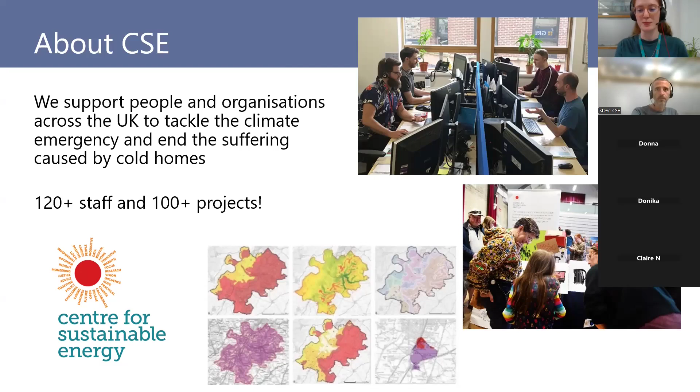Steve, I think this part is you. Just to point out, the community engagement team is not just me and Kate. This is to give you an overview of principles and what's involved and some of the things we all need to think about. We'll talk through pros and cons of different bits, but this won't be detailed advice for your house, and it's not going to replace the advice of a qualified professional that's looked at your home. It probably won't make you an expert, but hopefully it will give you some of the basic considerations.

After the online materials, so we've got these 3 units over 3 evenings, we'll have a downloadable home energy survey that you can take to look around your house. Steve and I are going to lots of Green Open Home or Green Open Home adjacent events in the next few months, so you're very welcome to come to an event and ask us questions. Some of our events will be going around homes and looking at issues that we're going to be talking about over the next 3 weeks.

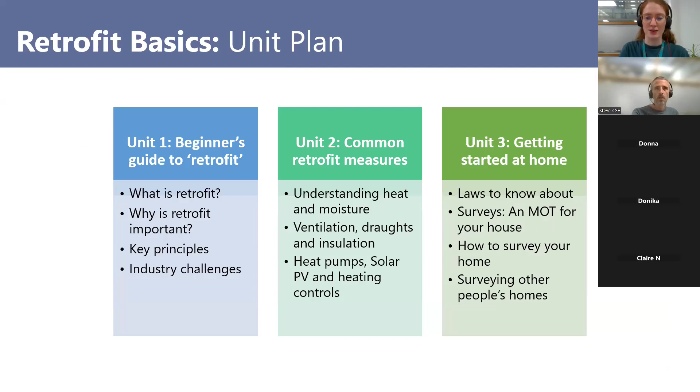So today we're starting with Unit 1: what is retrofit, why is retrofit important, and key principles. That's where Steve really gets to take the wheel and run away with the details. We might discuss some of the challenges and controversies in the field and conclude with the key things to remember from this evening. Steve, I've just realized I don't have the seeing the notes function because I'm recording on my screen, so please do butt in if I've forgotten something as I'm speaking. No problem. Great, thanks Warren, for joining us as well.

All right, I think this might be you, Steve. So what is retrofit? If anybody wants to unmute and have a shout out, have a guess. Some people think it's a very technical thing. I'd be interested to know if people have generally heard of the phrase retrofit before, or if it feels like something they don't know very much about.

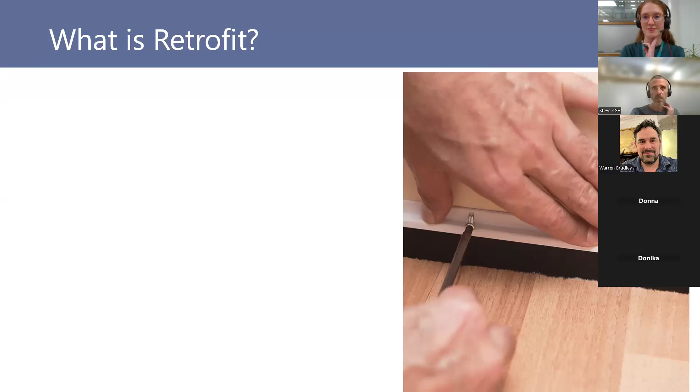Converting an existing property, okay. Yeah, yeah, I think that's pretty much bang on what we have here. It just means doing work to an existing building, try and make it more energy efficient, basically. It can include repair and maintenance, renewable technology, insulation, heating systems, and much, much more.

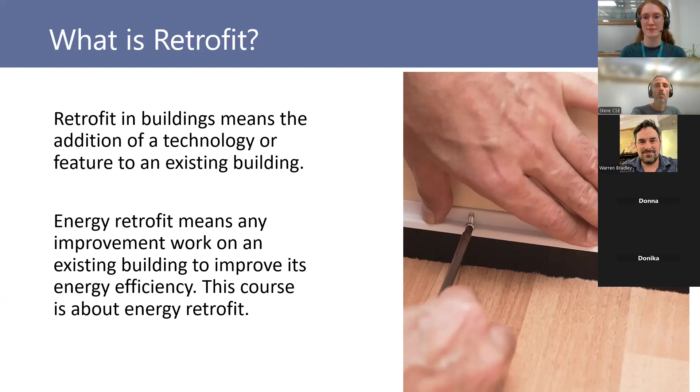When Steve and I have been doing our community events, it seems that some people hear the word retrofit and immediately think heat pumps, and that's the main thing they think of, but that's not just it. Oh yeah, thanks Hannah, no worries about the noise, that's fine.

In an ideal world, a good retrofit reduces your energy use and your consumption of carbon, so it's good for your bills, also good for the planet, and improves your health and comfort as well, ideally. That is what you aim to do. But poor retrofit - and there's been quite a lot of press about poor retrofit at the moment because of government insulation schemes having varying results - poor retrofit means failing to realize the savings, either energy, financial, or carbon savings. It can lead to increased damp, mould, fire risk, overheating, damaging our buildings, and damaging our heritage.

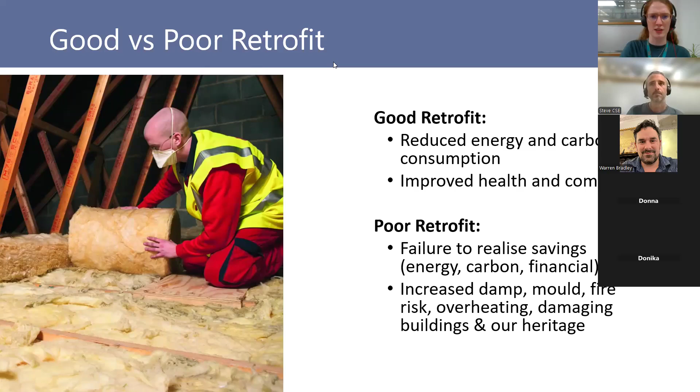Steve and I, in our projects, focus specifically on older buildings and traditional buildings, so that's a consideration for us. I think I might have that news article in the next slide. Oh yes, yeah, this was a favorite of mine. This is an example of poor retrofit that was in the news recently.

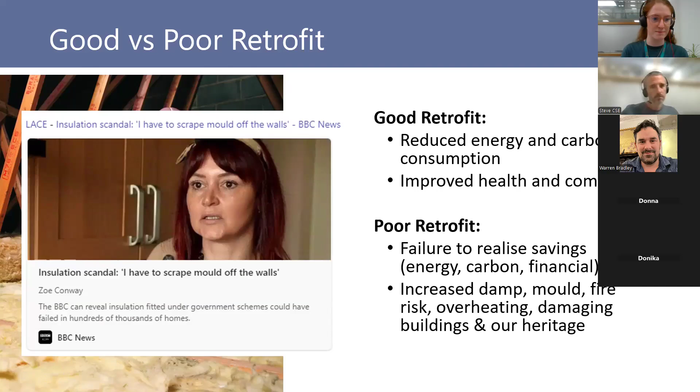But why, Steve? Why should we do it?

So why retrofit? Well, hopefully most of you are aware we're in a bit of a situation with our climate. Ideally, we should stop knocking down buildings and building new, because construction is particularly bad for the planet. We use a lot of heavily processed materials, and we tend to make a lot of waste. So if possible, let's try and keep our buildings, but make them fit for the future and a bit more resilient as our climate changes.

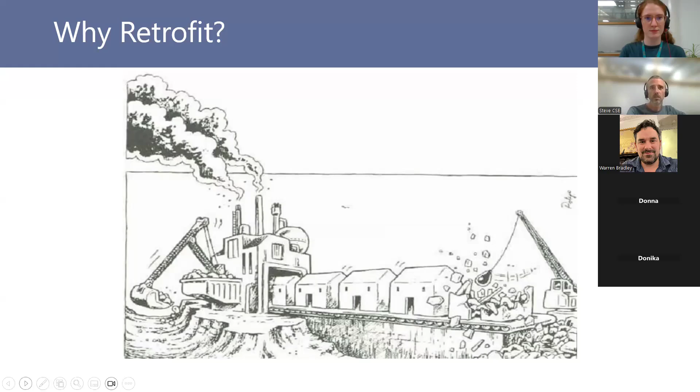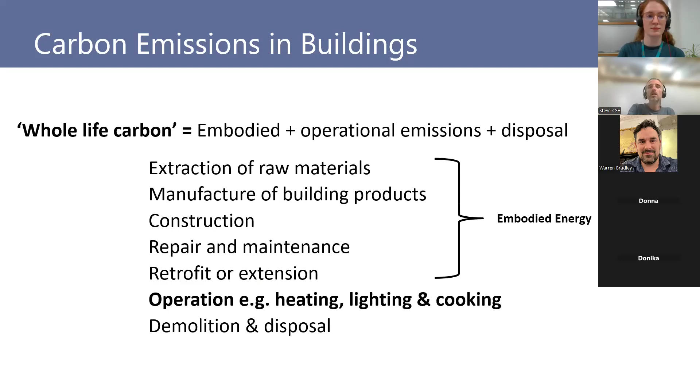That's why we try to encourage people to think about something known as whole life carbon, which includes embodied, operational, and disposal carbon. I think there's some more examples of that in the next slide.

And that's why we bring this up so early on in the training, just because it is kind of foundational information. In the next session, next Tuesday night, we'll talk more about specific measures, like double glazed windows and triple glazed windows, and have a bit of discussion around the pros and cons of installing new measures versus the embodied carbon of those new measures you're putting in.

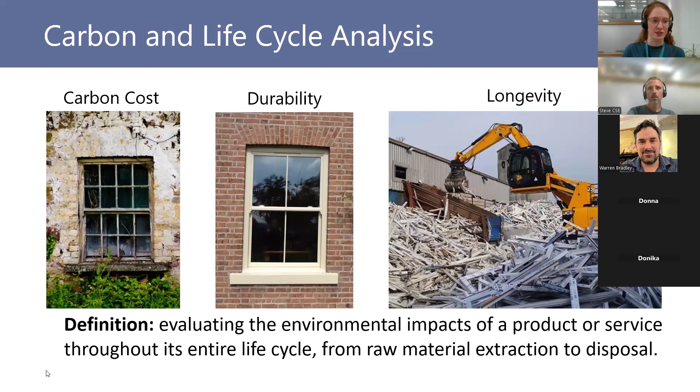Did you have anything else you wanted to add on this slide, Steve? I'm just looking at my notes. No, I think that's it.

So this is - lots of people tend to say our old buildings are old, damp, leaky, inefficient, and we should just knock them down and build new ones. I suppose the environmental point around that is actually, 80% of our buildings in 2050 are thought to already be built - sorry, I said that wrong. 80% of our buildings in 2050 are thought to already be built.

So we can argue, or try and get people to consider, that the most sustainable building is one that is already built. So trying to keep them and trying to improve them - that's why we retrofit.

And I realized, Steve, we forgot to say at the start your background and why you are a particular proponent of buildings that are already built.

Okay, I'm a heritage builder by background, so I am a qualified retrofit coordinator, and I also have my master's degree in sustainability and adaptation in the built environment. So I've given this quite a bit of thought over the years, and I've done a lot of actual work on buildings. So yeah, that's a bit about me.

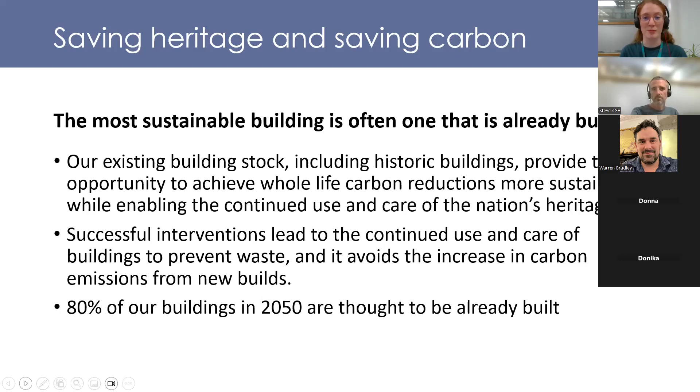Kind of your jam. And I have been working in community engagement with the Center for Sustainable Energy, but I am fairly new to this stuff with Steve, so I might be asking just as many questions as everyone else as we go along.

So climate change and retrofit. Traditionally with retrofit, people tend to think about improving operational energy efficiency in the winter. But we try to encourage people to think a bit more broadly than that. As our climate is changing, we also need to think about things like flood prevention. We are having more wind-driven rain, increased rainfall - I'm sure we've all seen that recently with some of the storms, and that's also led to flooding. But on the flip side, we're also getting overheating. Some of us don't think about that in the UK, and it doesn't happen very often, but when it does, it actually causes what's known as excess summer deaths, the same way we get excess winter deaths when people are too cold. We're also seeing increased relative humidity, which tends to encourage more mold growth. So it's not just about energy efficiency in winter - we need to think about the whole year with our buildings.

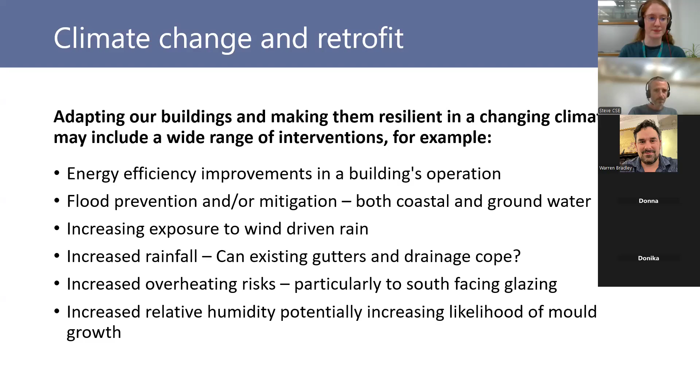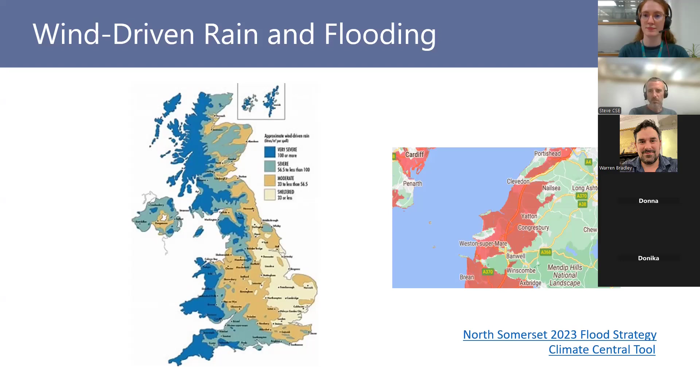All this is more reason why we should be doing retrofit. Steve, you were talking about overheating in houses being something we don't really think about in the UK.

Especially relevant in the political or funding climate, where insulation is something people are eager to give grant funding for, for people who live in areas of deprivation. But if we insulate all of our homes, we do need to still consider overheating.

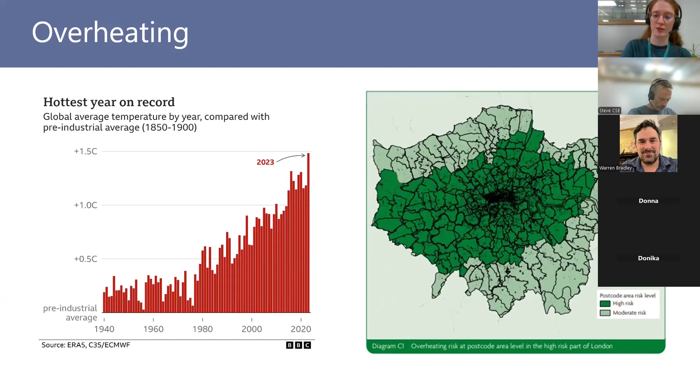The retrofit industry is also a place that is booming and will continue to boom in skills, education and jobs for people - there's a lot of opportunity in that field. It also builds pride of place, to look after the buildings that we have. So for these reasons, retrofit is great for adapting to climate impacts, and also hopefully contributes to leveling the playing field a little bit more.

Do you have anything you want to add to that, Steve? No, you're good.

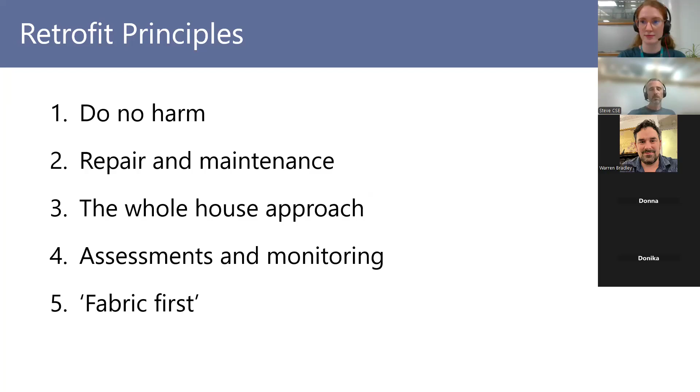So the first one, sometimes surprises people, but I like to think of it a bit like first aid. One of the things with first aid is first do no harm. I think we always try to encourage people to start from a position of knowledge and do a bit of learning about the building that you're in or the building that you're going to retrofit.

I appreciate people talk about climate emergency and there's a tendency to want to do everything very, very quickly, but we do need to understand what we're doing before we rush ahead and do it. So it's about starting with some knowledge, assessing the risk before we get carried away.

I know I said I can't read my notes from here, Steve, but I remember there's a line there that retrofitting your home isn't rocket science, but it is thermodynamics and building physics. Yes, so we'll talk about that thermodynamics next week. Yeah, we will. Very good. Yeah, we will talk a lot about moisture and mold next week.

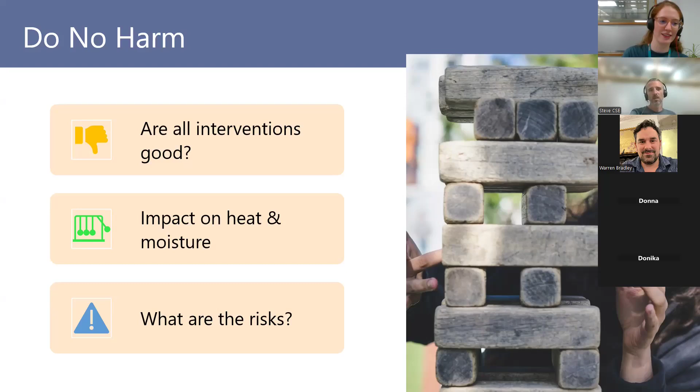So, lots of people don't sort of think that repair and maintenance is part of retrofit, but it really is. If we retrofit homes that are not in a good condition and haven't been repaired and maintained, then there's a chance that our work won't work.

And also after we've done retrofit, we still need to do repair and maintenance because there's a chance that the work we've done then gets undermined. I know there's been quite a lot of studies around this - it can actually massively reduce the operational emissions of a building.

So yeah, don't overlook it. I think that's the key message. And we'll have lots of examples of that next week. But yeah, if you're gonna put in new stuff, make sure the old stuff's working well first.

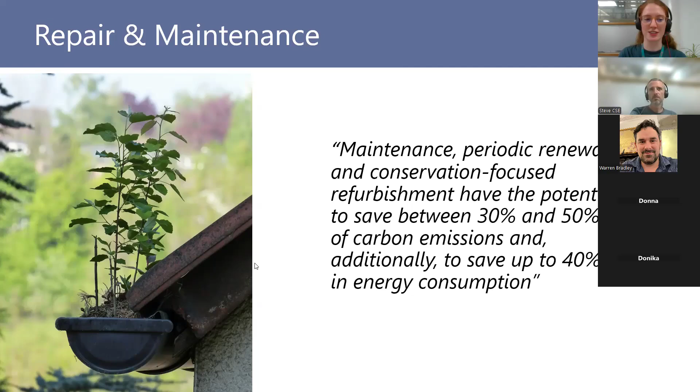Energy efficiency - forgive me if this sounds a bit complicated, but there's something called Jevons paradox. A guy a very long time ago, I think in 1865, noted that as we improve the efficiency of stuff, what actually happens is we tend to just consume things quicker.

And it's not just economists that argue for this. I've met lots of people that work in the conservation world who think maybe we need to be looking at energy sufficiency as opposed to efficiency. But I'll let other people decide that.

We do have something called rebound effects - that's where people can retrofit their homes, but then go on lots of long haul flights and end up using more energy, emitting more carbon.

Then we have things like pre-bound effects - we'll talk about this a bit later, but some buildings are not as inefficient as people think. So what can happen is you think you're going to save all this carbon and money on your heating bills, you do the work, but actually it doesn't save as much as we think. So it's just being aware that there are a few sort of pitfalls, I suppose.

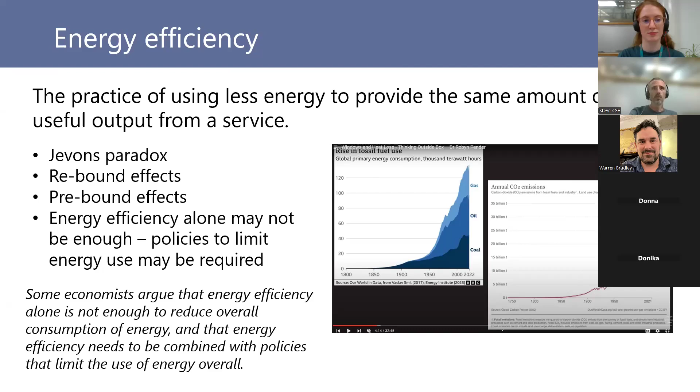And a whole house approach - apologies. Oh, no, go on. No, no, you go. Okay, but then make sure I'm saying it right.

Okay, so the whole house approach is really key to good retrofit, and it basically means this is not a one size fits all operation. You need to think about everything that's happening in that house to make it a bespoke approach for a balanced solution for that house. Specifically in this diagram, looking at the services - what's coming in and out of the house, your pipes, your cables, internet, that sort of stuff.

The fabric of the building means the walls, the roof, the floors, the outside envelope of your house. So what's that made of? What condition is it in? How old is it? Do you know how long it's been there for? Get as much information about that as you can.

The use of the house. What is the house being used for? This links quite closely to people - is it a very large building that just one elderly couple live in, so they don't use many of the rooms, or is it a share house with lots of people living in it who move in and out quite frequently, so they don't have time to look after the building? What will work well for one building won't work well for another, even if at a general glance they seem quite similar.

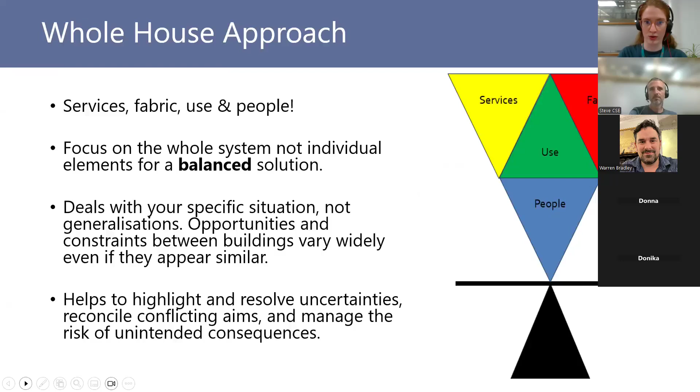When it comes to knowing what is going on in your building, assessments and monitoring are the key way that you can find out more about how your building is used. What is the air quality in your house? What is the humidity in your house? What is the condition of the insulation that's been in your walls for 30 years? All of that comes back to assessments and monitoring.

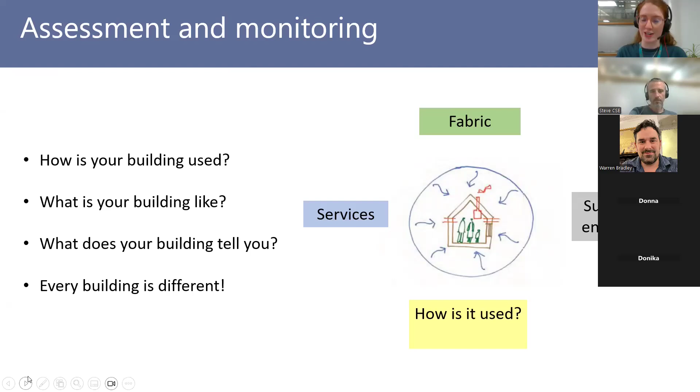For example, an assessment you might have heard of is an EPC certificate. Every home should have an EPC certificate if it's recently been bought or is being rented out. That's one example of an assessment that will give you an indication of how energy efficient your house is. But we'll talk a little bit more about EPCs here.

This slide is always controversial, because a lot of people tend to get taught this - oh, every house loses 35% through the walls and whatever. But I suppose it's just really trying to hammer home the point that all of our homes are different, and whilst they may look similar, you might have a neighbour that lives in a house built at a similar time to you, particularly if they're older buildings.

They've probably been worked on very differently over the years - sometimes it's more than 100 years. They will have had different tradesmen using different materials, they might have different heating systems, and again they're all used differently. So I appreciate why people like this image, but it frustrates me a little bit because it makes everybody think 'oh, my house loses this and my house loses that through the windows.' It's not quite that simple, unfortunately.

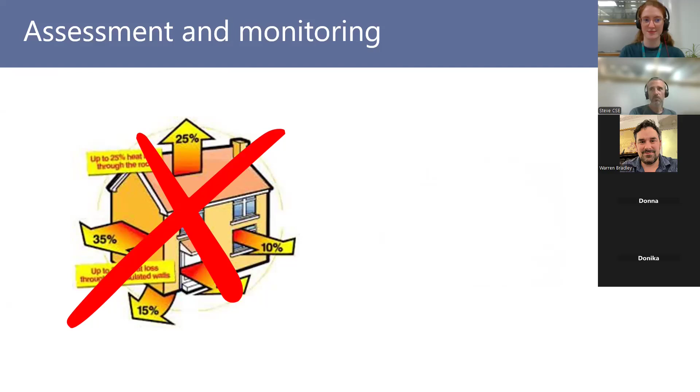This next image is Steve's preferred image - the size of the pie charts are all different because all of our homes are different, but actually the breakdown of the energy use in all of those pie charts is even different again. So it's just trying to be a bit more nuanced with this, and get us to think: well, my house will lose less heat if I've got loft insulation, whereas my neighbour doesn't have loft insulation, so that 25% figure might not be appropriate there. It really does come back to that whole house approach.

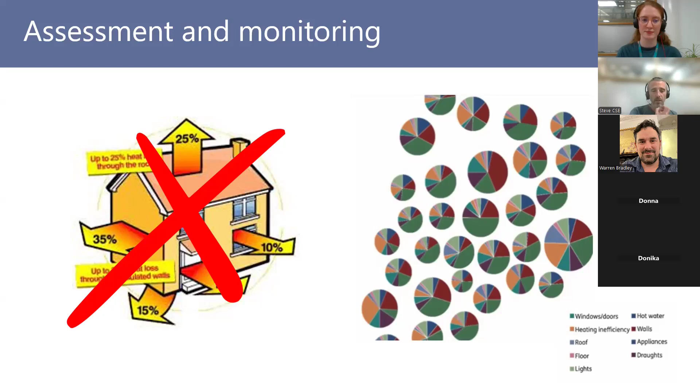Okay, assessments and monitoring. So I know Kate's just mentioned EPCs. Has anybody, well, I'm guessing a lot of you might have EPCs on your house. Has anybody looked at the recommendations that they've done?

No? Any volunteers? People can type in the chat. Sometimes, certainly not on older houses, but the more recent houses I've had them done, and yeah, it seems a bit wishy-washy sometimes.

I think I understand why lots of people like them because they try to provide a very easy overview of comparing our houses. But they tend to overlook a few things.

They tend not to consider the condition of a building. So if a building is damp, it's not reflected within the EPC. If a building is in a poor state of repair, that's not reflected in an EPC either. And as Kate was talking about before, we use our homes differently. So if you've got an elderly couple living in a house and then they move out and a young couple with lots of kids move in, that house is going to use energy in a very different way, and that's not reflected within an EPC.

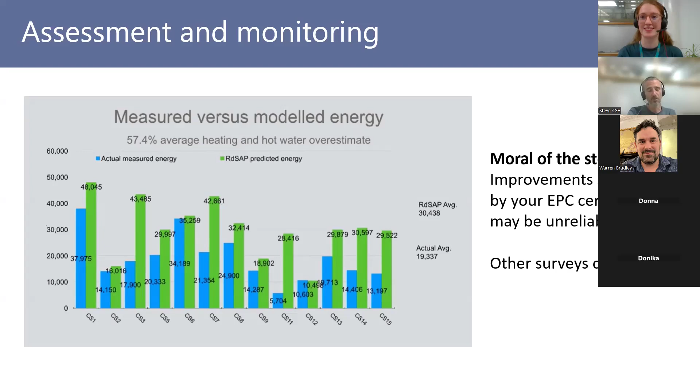And it's like back to that damp and mold stuff. If you've got damp and mold in your house, it doesn't matter what your EPC says—you've got damp and mold in your house, and you want to try and deal with that. 100%, yeah.

So, has anybody heard of Fabric First? Oh, yes, that's a good question. You could give us a reaction—thumbs up if you've heard of it, thumbs down for no. I'm not hearing much on the wavelengths.

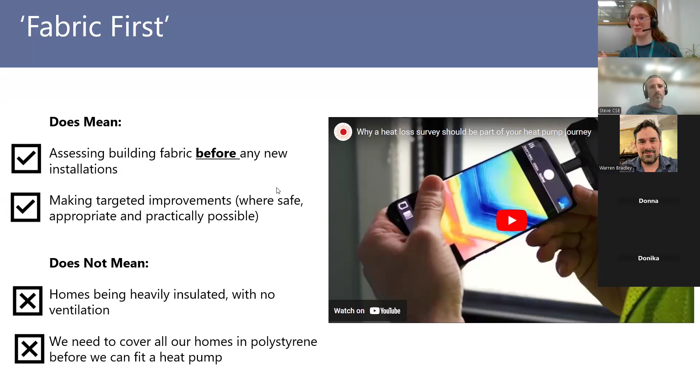Okay, this is really interesting for Steve and I, because Fabric First has been—thank you, Donna—Fabric First has been like a mantra, a slogan, a buzz phrase in the retrofit world for years. And to the point where now there's all this myth busting around what Fabric First should mean and what it shouldn't mean. We as a community engagement team felt like, oh, we need to make sure that people know what it really means. But if no one's heard of it in the first place, does it really matter?

Yes, so talking to that, I suppose in the retrofit industry, and what retrofit people get taught, everybody gets drummed into them Fabric First. There's something called the energy hierarchy, where it sort of says make your fabric of your building as efficient as possible before you fit a heat pump, before you get solar panels. And people have been insisting on this for a very long time.

But now there's a sort of counter argument to that, saying well, actually, at the rate that people are insulating their buildings, it'll take hundreds of years before we get down to being able to put in a heat pump. And as we talked about in the last slide, where we were looking at measuring energy use in buildings, it's really quite interesting that once we start to measure the energy use, we can discover that actually lots of our buildings are suitable for heat pumps now. By insisting on doing all this work to a building's fabric, it's actually preventing people from switching to low carbon heating, which is really what we want to encourage.

So I suppose we wanted to just talk about this a tiny bit. It's one of those things that in an ideal world you probably wouldn't need to know it, but it will come up. People do tend to talk about it, and lots of people are quite militant and insist on it. But we like to be a bit more nuanced with it. I think what we've agreed it does mean is: do assess your building fabric before you start doing things, do make targeted improvements where safe, appropriate, and practically possible. So things like loft insulation, if you haven't done it, it's a good idea to do it. But it doesn't mean we need to cover all of our buildings in polystyrene before you can fit a heat pump. So yeah, just wanted to clear that up.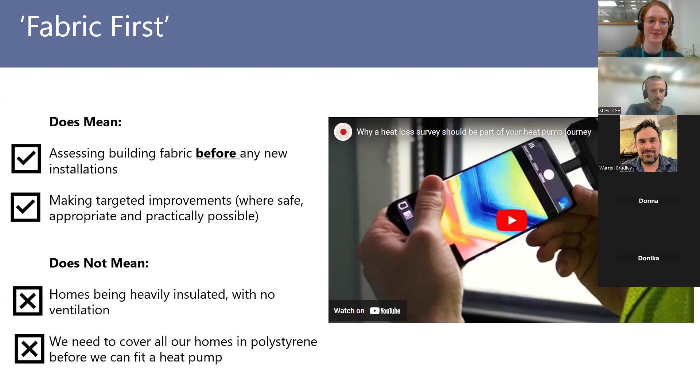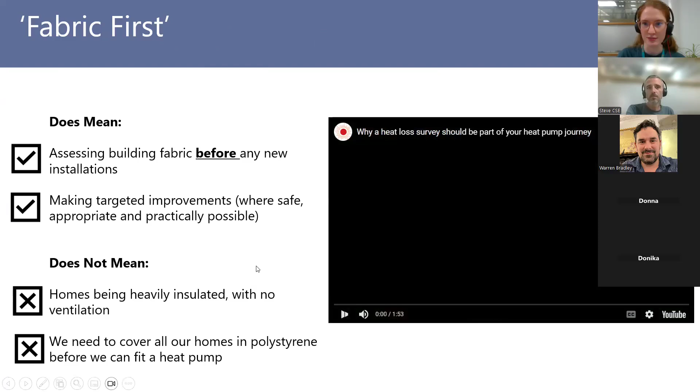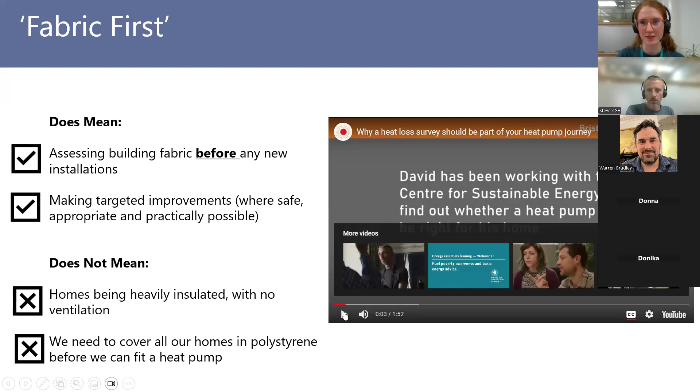Oh, did you want that video, Steve? I forgot there was a video in there. Yeah, no, go for it. Did the video play? Can you hear that noise, Steve? Is the sound coming through? I can't hear anything, no. Okay, let me just share the sound. Okay.

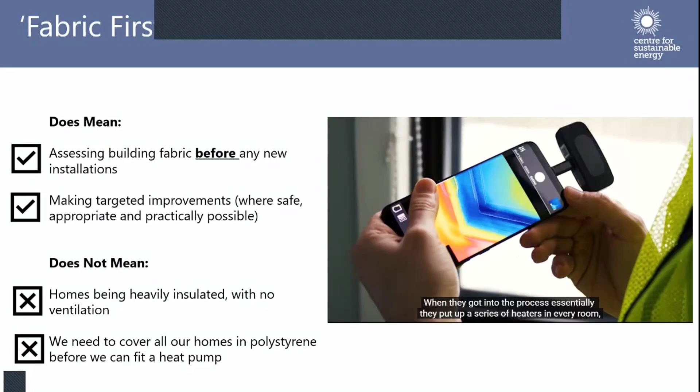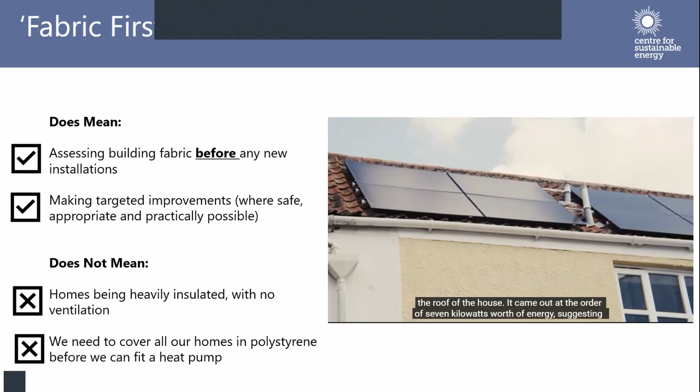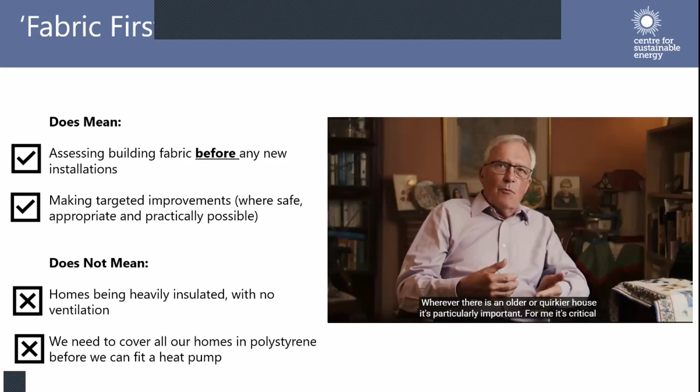I had a heat loss survey done approximately a year ago because I wanted to know whether a heat pump would be appropriate for this particular house. I think it's a complex area that I need a lot of advice in, and it seems to me that the heat loss survey is the most important part of that. They sent down two engineers who were going to measure how much heat was being lost from the building. When they got into the process, essentially they put up a series of heaters in every room. They switched them up to 25 degrees overnight, and at midnight they switched them all off, and they measured the amount of heat loss through the walls in every room. That gave us what they called a thermal coefficient, which was basically how much energy is being lost through the walls and the roof of the house. It came out at the order of 7 kilowatts worth of energy, suggesting to us that a heat pump would have to put in 7 kilowatts in order to maintain an even temperature. It was surprising how low that was compared with what I had expected. Thanks to an engagement with a local organisation called SusWOT, or Sustainable Westbury-on-Trym, I've been finding a great deal about heat pumps, reading up about them and trying to find out what is best for this particular house. The journey is a significant one, and it is not right for all people at this time. I think it's about getting advice. It's essential to have a heat loss survey done in most houses. Wherever there is an older or quirkier house, it's particularly important. For me, it's critical that it has happened to make sure you get the right size of heat pump in the right properties.

Thanks for sharing that, Kate. That was taken from a project that we worked on last year, and at the time we did a lot of community engagement, knocking on lots of people's doors, and everybody seemed to be saying, 'No, I can't have a heat pump. I've not insulated all my walls, and I've not done this, and I've not done that.' It's quite interesting that when you start measuring heat loss, it can quite often change your perspective a bit.

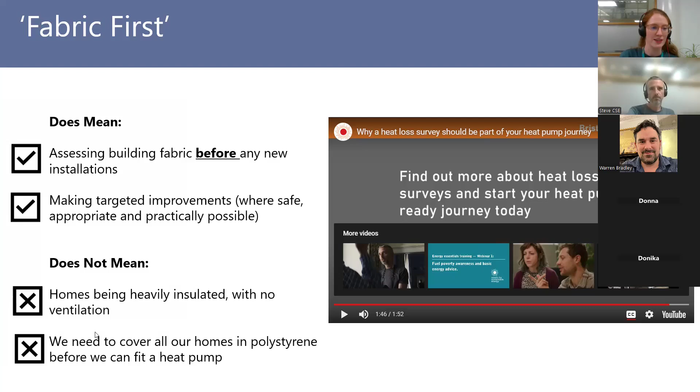It turns out that heat pumps are suitable for old buildings, and they're suitable for lots of buildings. So don't rule them out. We talk more about heat pumps next week when we talk about different measures you could install in your home. But yeah, it very much ties into fabric first - that's when it all gets brought up, when heat pumps come into the conversation.

All right, no, you go. Oh, you're okay. Okay, I'll do this one.

This is a completely different method of managing moisture to a modern building with a cavity wall. A modern building with a cavity wall is more like a waterproof envelope, and we're trying to keep the outside wall completely out and the inside wall completely in. The gap between the two walls, the cavity, keeps the internal wall dry, and the external wall is the only part that gets wet and then dries out.

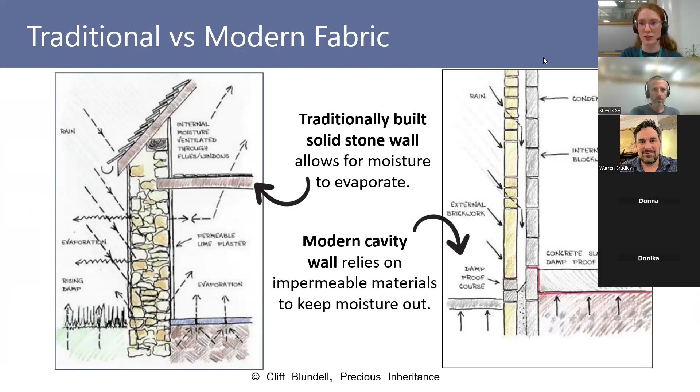So both of these methods, great methods, they work quite well until we put modern waterproof materials onto our traditional stone walls. It's not just traditional stone - there's lots. I've done lots of building with mud and earth buildings, and it might be surprising, there's quite a few in the UK.

But generally, if you've got what is called lime mortar - that's the bit that everybody thinks sticks all your bricks and stones together - if you've got lime mortar, then that means it's what's called vapor permeable, so it can, as Kate said, get wet. For any of you in North Somerset or by the coast, lots of our older traditional buildings tend to have really big, thick stone walls.

The idea was that they will probably get a bit wet when it's really rainy, with lots of wind-driven rain and sea spray from the ocean. But because the walls are so thick, it shouldn't get all the way through. As we're heating our homes on the inside and the wind comes past on the outside, hopefully the walls dry out again.

But as Kate was just touching on there, the problems tend to come over the years because somebody's come along, removed the old lime mortar render or lime pointing, and replaced it with modern cement renders, which tend to be harder and a bit more waterproof. There's lots of people around selling injected damp-proof courses. But what tends to happen when we get things like broken tiles or leaking rainwater guttering, lots of moisture can come into the wall, and because it's now covered in a more waterproof material, it quite often stays in the wall. So there's lots of damp walls out there.

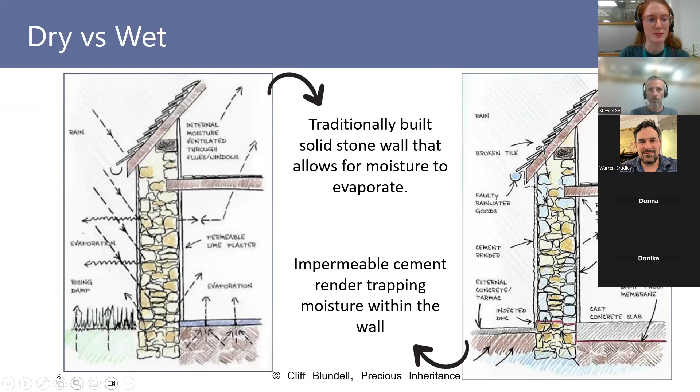Well, if you want to ask questions now, does anybody live in a traditional building? Yes, okay. And that's one of the things I'm really interested in - things like external cladding and what effect that would have and what the considerations are. I suspect that's covered next week. Good. Do you know if your building is covered with cement?

No, certainly because my parents have been there 40 years. The builder I know they've been using more recently has definitely been using traditional lime and not concrete renders, but I couldn't guarantee it.

I always find that really interesting because if you've lived in an old building for a long time... The last time we did this webinar, a lady was explaining how she had a builder come in, inject a damp-proof course, and cover it with cement, and it didn't work. Years later, she had to do some learning and remove everything that had been done. So that's why we say learn a bit about your building first and try to understand what you've got and how it works.

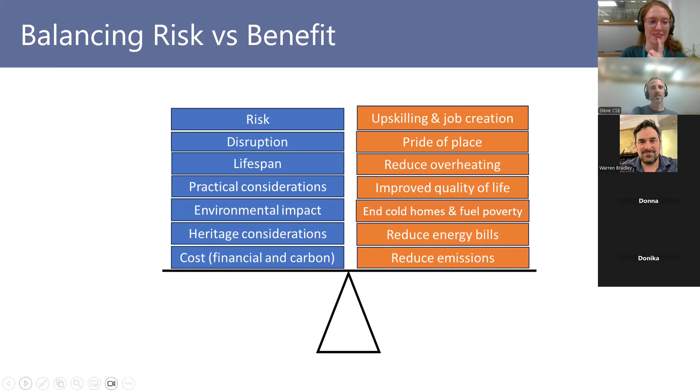Where have we gone here? I think this might be one of the last things - just as a final point, avoid undermining your interventions. Retrofit is not fit and forget.

Maintain, repair - it's interesting, Warren, you asked about things like wall insulation. I've seen it on buildings where they've covered the wall with insulation, but then the gutters have leaked and the walls have got wet, and the insulation then is adding to the problem - it's not helping. So it's just making sure we don't overlook things like repair and maintenance, because it really is very important.

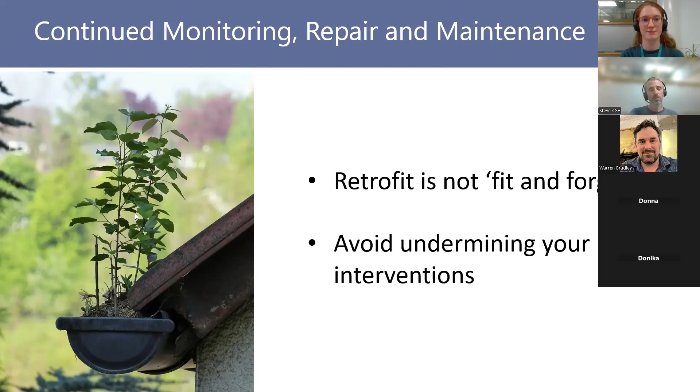I've recently done some training with a thermal imaging drone, and the guy teaching us was a former pilot. He was drilling into us the importance of planned preventative maintenance, because with an aeroplane you can't just not do that and then have something break when you're in midair - it causes lots of problems. So it's actually about having maintenance plans. How often do we clean our gutters? Do we go out and have a look at them when it's raining? Are they leaking? So yeah, don't overlook repair and maintenance - that's a key message.